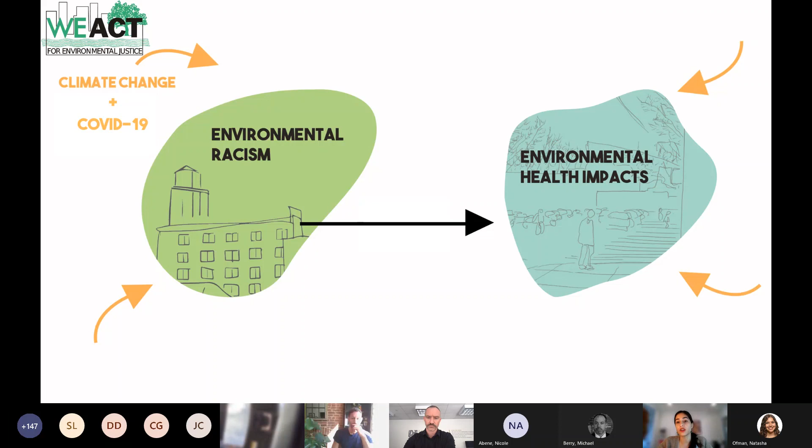Our investment is that, as an organization, we believe in environmental justice, which is the idea that everyone deserves to live in a healthy community where they can live, work, play, and pray. Particularly, what we are trying to do is interrupt the line between environmental racism, which creates environmental health impacts. And now we're at a place in the world where climate change and the climate crisis have gotten to such a bad level that we are seeing those direct health impacts and economic impacts and just general security impacts on people that live in communities of color and low income in New York City.

And then COVID-19, of course, did not help and made matters much, much worse. So we advocate for healthy housing, which is just generally the idea that everyone deserves a healthy and safe home. That was our big motivator for why we wanted to see this bill move forward. We believe that going electric and electrifying buildings leads everyone to have a healthy and safe home. So you can go to the next slide.

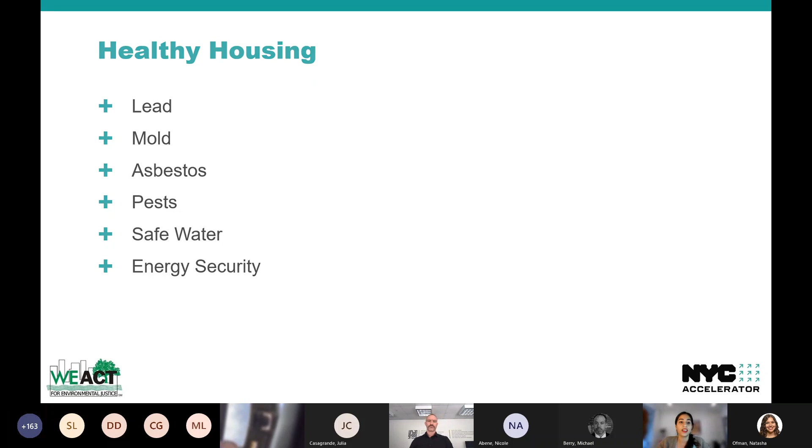Some of the main pieces of healthy housing are housing free of lead, free of mold, asbestos, pests, clean water, and, in this case, energy security — which is essentially the idea that every tenant or homeowner can afford their utility bills, a big discussion now, that they have thermal comfort so their house is adequately hot or adequately cold at the right times, that there aren't toxic air pollutants hurting health and leading to respiratory illness, cardiovascular illness, cancers, all sorts of health issues, and that we're not using fossil fuels anymore because we know that's what's contributing to the climate crisis and leading to all sorts of extreme weather events.

And now we're talking about it geopolitically in a way that really puts people at risk.

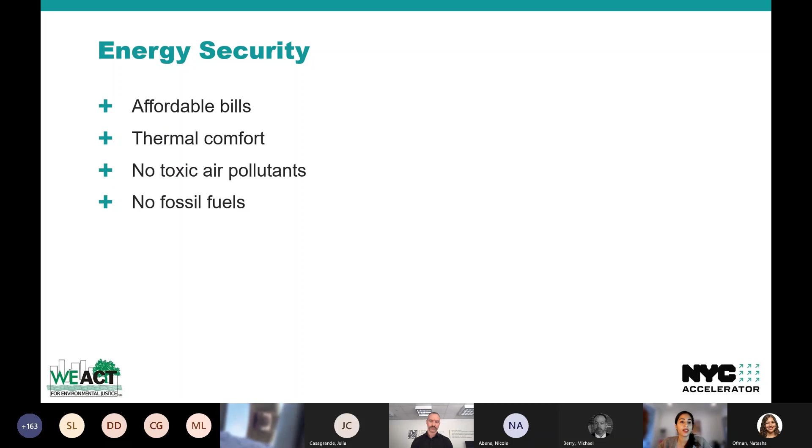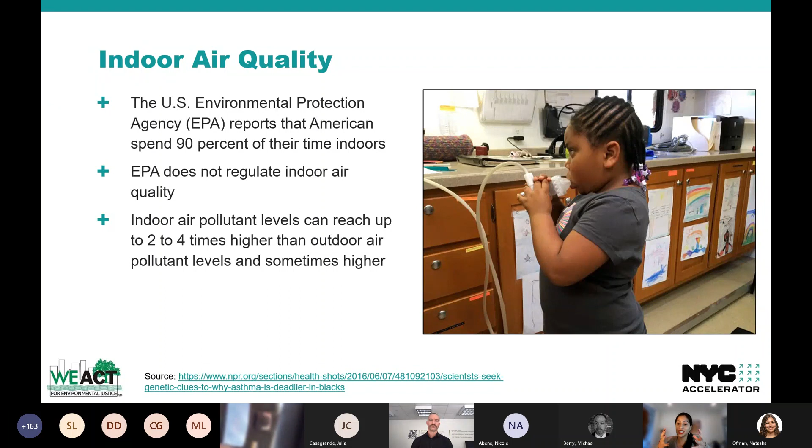We wanted to see the Electric Buildings Act move forward because we were concerned about indoor air quality. It's one of the biggest things we work on as an environmental justice organization. The EPA says that 90% of people spend 90% of their time indoors, yet they do not regulate indoor air quality. We know there are a lot of indoor air pollutants that can be really potent, especially if people are sitting in an enclosed space with that air pollution.

And that is not impacting people equally. We see low-income communities, particularly households of color, exposed to a lot more indoor air pollutants due to long-term disinvestment in housing or lack of affordability of better quality housing. People live in smaller houses with more people living in there, so crowding is really common, along with inadequate ventilation in homes, especially with regards to using a stove.

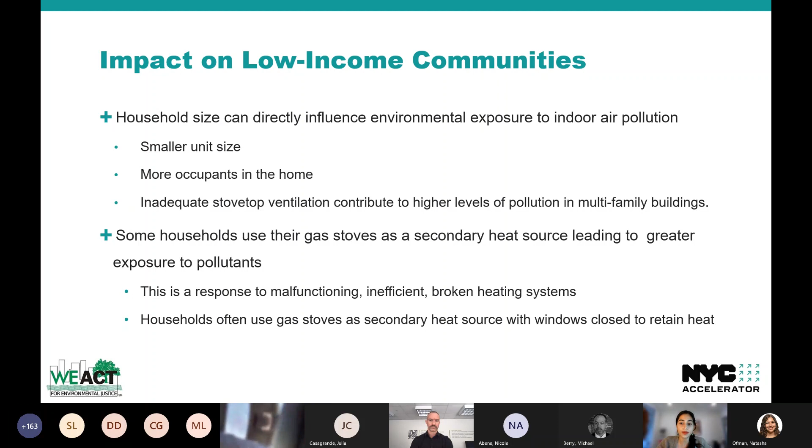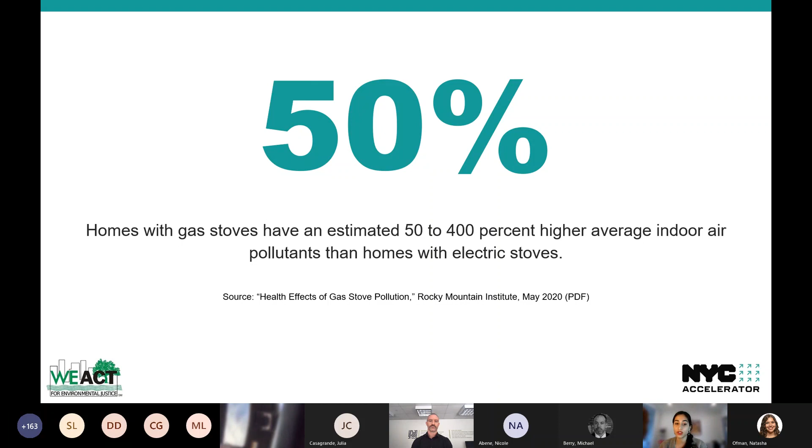Just a couple of stats here. Gas stoves are something we wanted to see switched out in homes, and that's part of the important process of electrifying a building—electrifying all of the things we use in homes that might otherwise contribute to health impacts. Gas stoves, we know, are full of air pollutants. Homes with gas stoves have 50 to 400% higher average indoor air pollutants than homes with electric stoves. So we know something is going on there when it comes to health.

We know that 55 to 70% of homes with gas stoves without ventilation experience indoor air quality that would be considered illegal if those levels were outdoors. So we know it's unsafe levels.

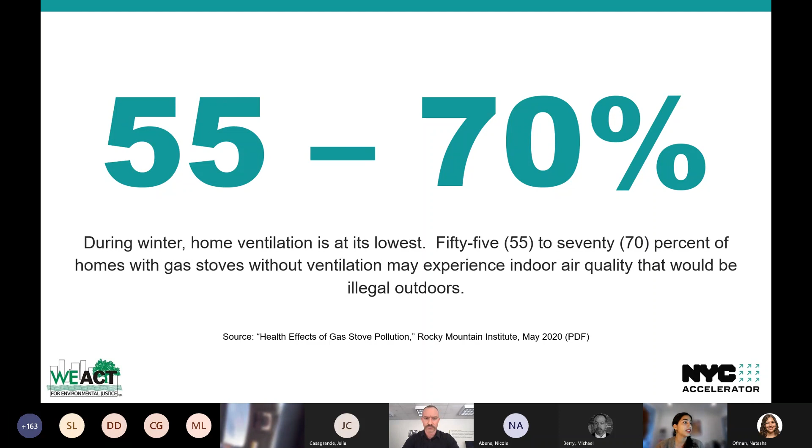A recent study found that it only takes a few minutes for the levels of nitrogen dioxide to pass a safe level once the stove is turned on. Stoves also lead to methane emissions even when they're off. We know that NO2 is a toxic pollutant that hurts health. So we have a huge investment in seeing all-electric buildings move forward, not only to fight climate change, but to create healthy indoor homes for people.

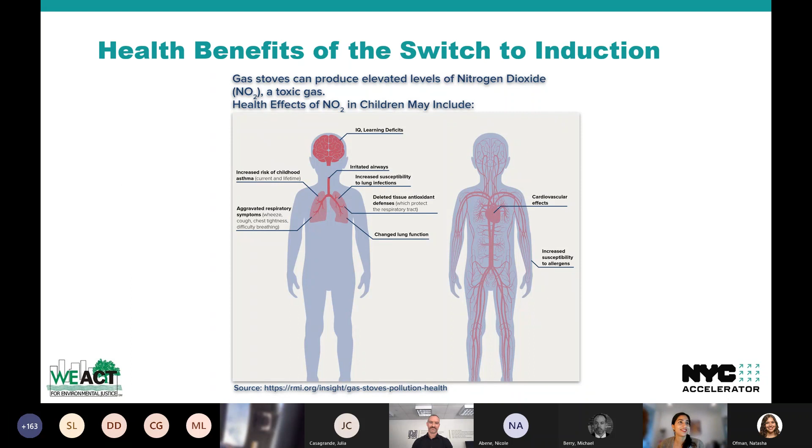So just to conclude, why do we care about Gas-Free NYC, which is the push for the All Electric Buildings Act in New York City? It's because of this air quality improvement.

But secondly, it's because we're mitigating the climate crisis—we're getting off fossil fuels. The next reason is because there are job opportunities for electrification and growing that field. The more buildings that have to go electric, the more opportunity there is for good jobs.

And the last reason is pushing technological advancements forward. If the city has to create buildings that are becoming electric, how are we making sure we have the technology for it? There's a lot of discussion about what buildings are ready and not ready for becoming all electric. Now, having this bill on the books saying that in a couple of years different buildings of different sizes need to start building electric, the industry is going to prepare for it because they have to, and because it's already in process.

So these are some of the big reasons why we were pushing Gas-Free NYC, and we were really excited to see it moving forward, and looking forward to seeing how all of New York City can live in healthy housing. So thank you.

All right, thank you, Sonal. That was a great high-level overview of all the benefits of electrification.

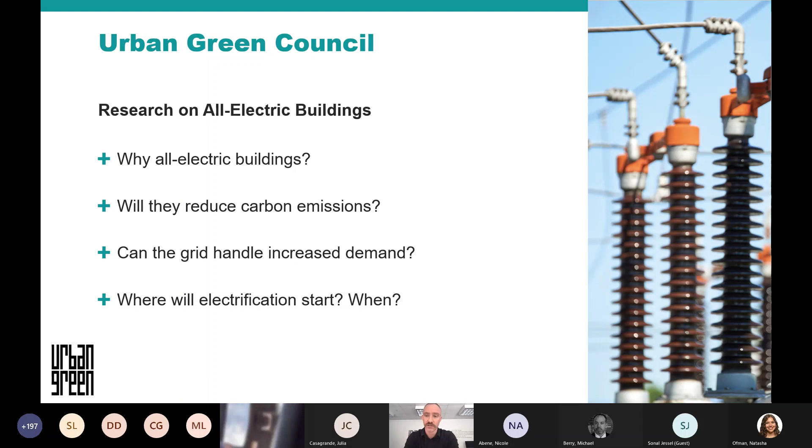All right, so why are all electric buildings so important? I would assume most of this group knows that two-thirds of New York City's emissions actually come from buildings today.

That's about evenly split between the mid-size and large buildings versus the smaller 1 to 4 family buildings. The big purple box is everything above 25,000 square feet, so that's everything affected by Local Law 97. The last third is transportation, waste, and streetlights. This really highlights why, as opposed to a lot of other cities, we have to focus on finding a path to cleaner buildings.

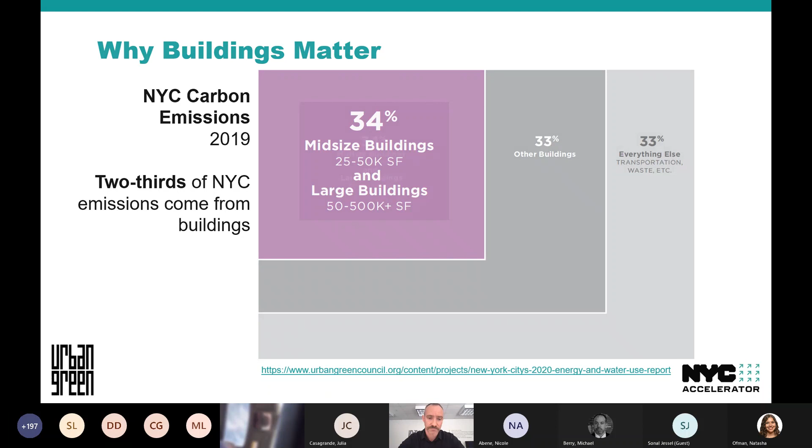So we've made a lot of progress over the last decade. Emissions are way down. A big part of that was actually a successful policy called the Clean Heat Program, that phased out heavy fuel oil in 2015.

So nearly all of the number 5 and 6 fuel oil is now gone. But you can see that gas has almost doubled, so it's about half of our energy use now in New York City's buildings. It's the dominant force. It's been cheap, it's been a lot cleaner than fuel oil, and energy efficiency programs have really been targeting electricity. So that yellow band has actually fallen over the last decade while gas has taken over.

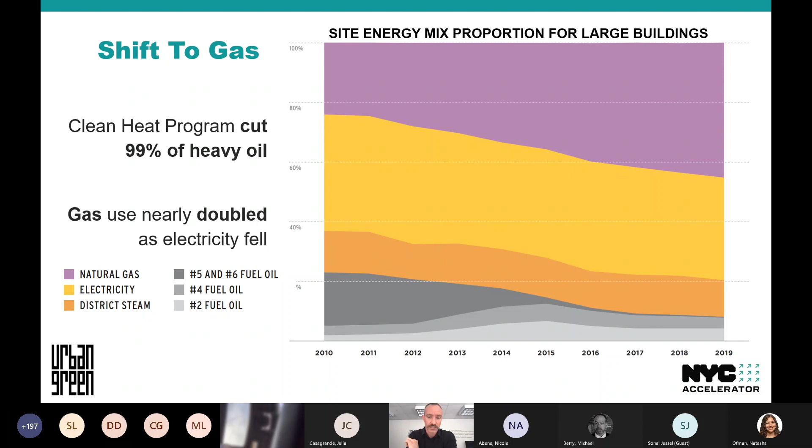So a big component of the growth in gas use has been new construction, right? And that's what this law is really targeted at. So let's quantify what we mean by new construction and how much that might mean.

Over the last decade, between 1,000 and 3,000 new buildings are built each year in New York City, and that's between 35 and 45 million square feet. Obviously we're talking about averages here - there's a lot of volatility in this market.

Most of it is single family homes, but there are about 200 new high rises built in New York City every year. You can see some of that data on the big buildings that REBNY now tracks as part of their quarterly construction report. Pretty cool data you can check out at the link as well.

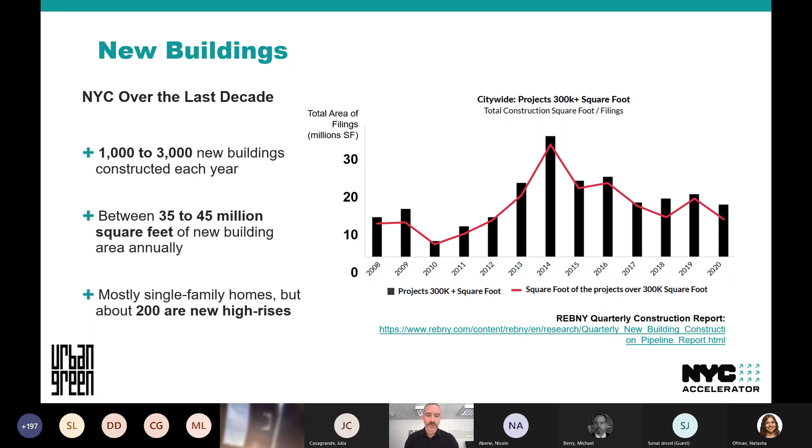All right, so we talked a little bit about the landscape of buildings in New York City. Now I'm going to go into some of our detailed information on how we're going to do this.

So we published Going Electric in 2020. That was focused on how we're going to retrofit multifamily buildings. And then in December 2021, we published Grid Ready, which is all about whether Con Edison's local grid is ready for this change.

So to start off, I just want to make sure that we're all on the same page with beneficial electrification. We're talking about heat pumps, and heat pumps are just air conditioners that work in both directions. Even in winter, there is outside air that has heat that can be pulled inside, and that's enough heat to warm your home, even when it's cold outside.

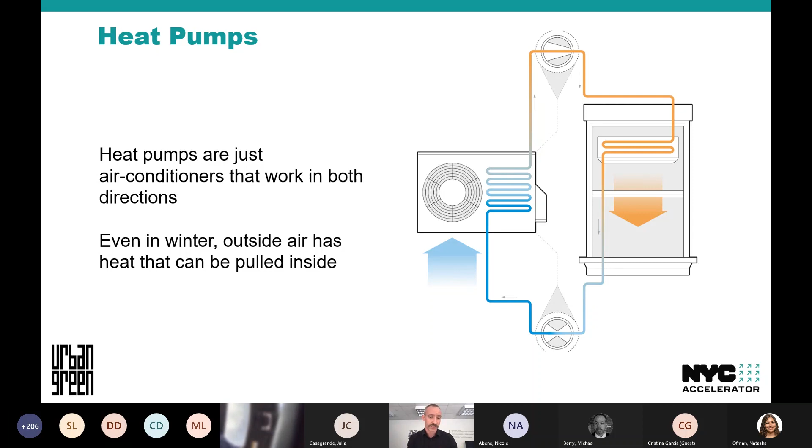That's opposed to something like thermal or electric resistance heating, which is similar to a toaster oven, where you're just exchanging 1 unit of electricity for 1 unit of heat. But heat pumps actually have the ability to take 1 unit of electricity and turn it into 3 units of heat.

So it's a big difference, but how much is this going to cost? This is pretty new information on the slide. We don't have a lot of examples of all electric buildings in New York, but some of the best information comes from NYSERDA's competition called the Buildings of Excellence competition. All of this data is public. They've already completed 2 rounds of winners, and the second round of winners was actually exclusively all electric.

So they've published this cost data, you can go check it out on their website. But it looks like the incremental costs per square foot are going to add about 6% to new construction in New York City and about 7% in upstate New York. They're pretty different, mostly because of the geographies there.

But then if you layer in incentives, the extra cost in New York City is just 3%, and then it's about equivalent for building in the rest of New York State, all electric versus traditional construction. So it's including everything from heat pumps for heating, domestic hot water heat pumps, as well as electric appliances for cooking.

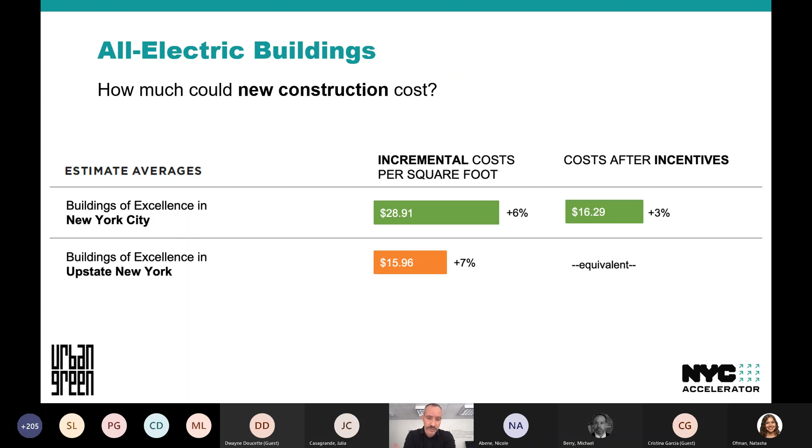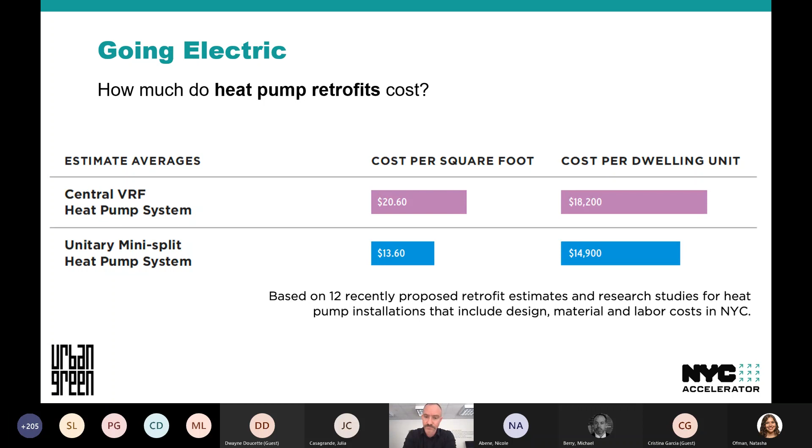That's a big difference from the next slide that you'll see. We also collected data as part of the Going Electric report to figure out how much the retrofits would cost. These are going to be a lot more expensive, and these numbers are only looking at the heat pumps used for heating, so if I was to replace steam radiators with heat pumps. We think it's going to be between $13 and $21 per square foot to do these retrofits. These are going to be much more costly than doing new construction, mostly because of all the invasiveness involved in putting in new equipment and relocating tenants during the retrofit.

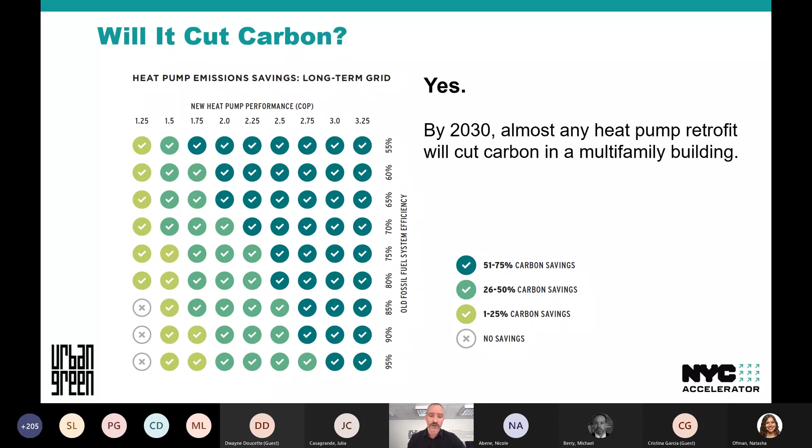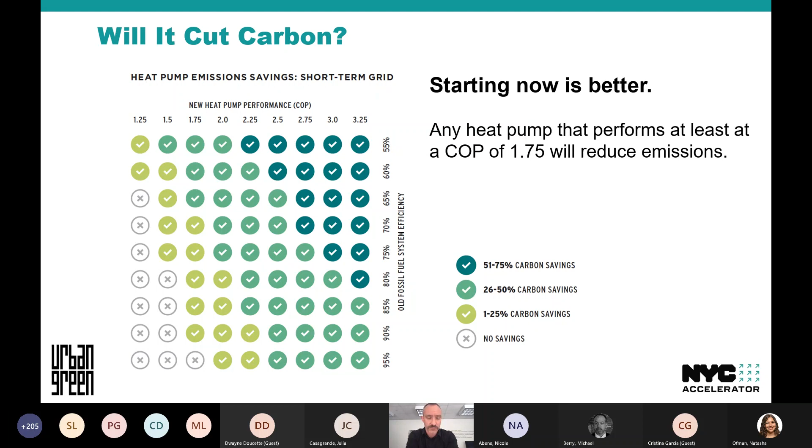But starting today is actually even better. This is with a grid that includes the closure of Indian Point, so this is like today's grid. We see that even heat pumps that operate at a coefficient of performance of at least 1.75 will also reduce emissions. So it's really something we should start to do today and take action. Our grid is good enough right now to be installing heat pumps.

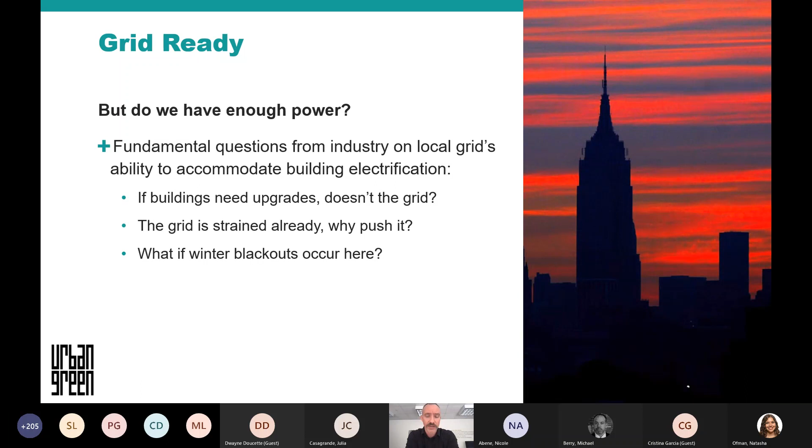Now we come to the grid piece of this. Over the last two years we heard these kinds of questions: if my building needs an electrical upgrade, shouldn't the grid also get a capacity upgrade? I know the grid is strained during the summer, so why should we push it harder? And finally, what would happen to an all-electric building if we had a winter blackout? Let's talk a little bit more about those.

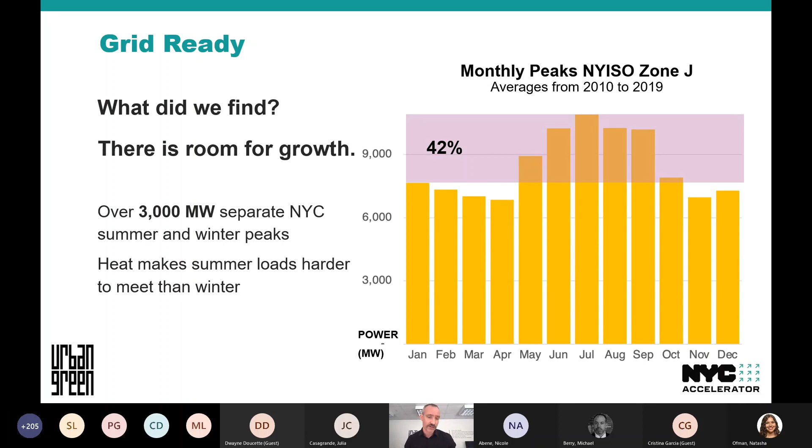First and foremost, we looked at NYISO Zone J. NYISO is the New York Independent System Operator, and that's really how they quantify New York City—we're Zone J. We just looked at the monthly peaks over the last decade, and we saw a monthly peak in July that's typically around 11,000 megawatts, and then a peak in January around 8,000. So there's about 3 gigawatts separating those two, meaning there's a lot of room for growth at the city level. On top of that, when it's hot outside, it actually makes it harder to deliver really high loads. That's why we get a grid that's stressed out in the summer—we're pumping out a lot of juice to serve air conditioners, but it's also really hot for the equipment to be delivering that power.

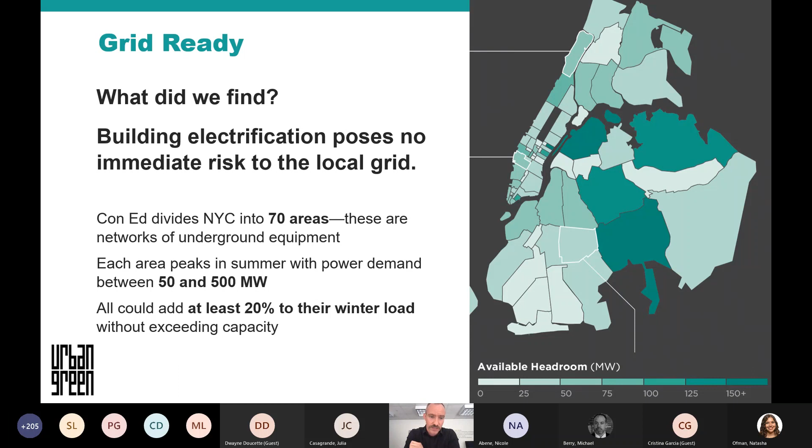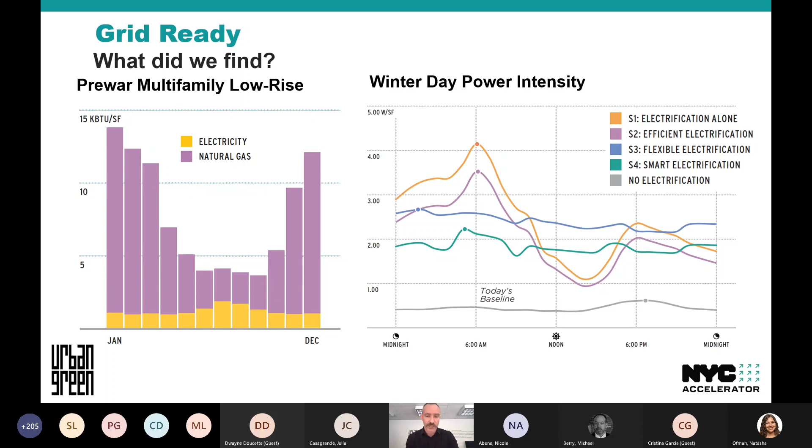When we install heat pumps, nothing else, no efficiency, no storage, we get that orange curve that peaks at 4 watts per square foot in the morning, and then it falls down to a valley around 1 watt per square foot in the afternoon. So that's a really difficult load curve to serve. We want to avoid that. We want to install things like roof insulation and new windows and big hot water tanks so that we can flatten out that demand curve throughout the day. So I'll give you a little bit more detail on that one.

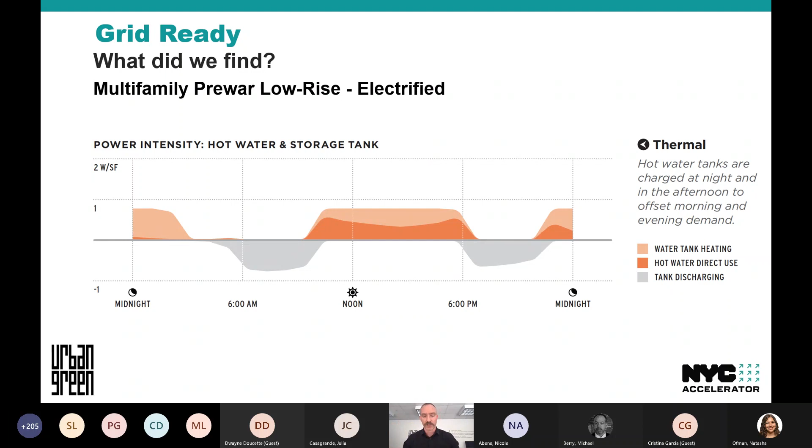And then if we layer on top of that the next piece, which is the heating, again, our heating loads are probably going to be highest in the midnight to 6 a.m. range where it's very cold. And so we're going to need some battery storage to offset some of that so that we don't get an extremely high peak in the early morning hours.

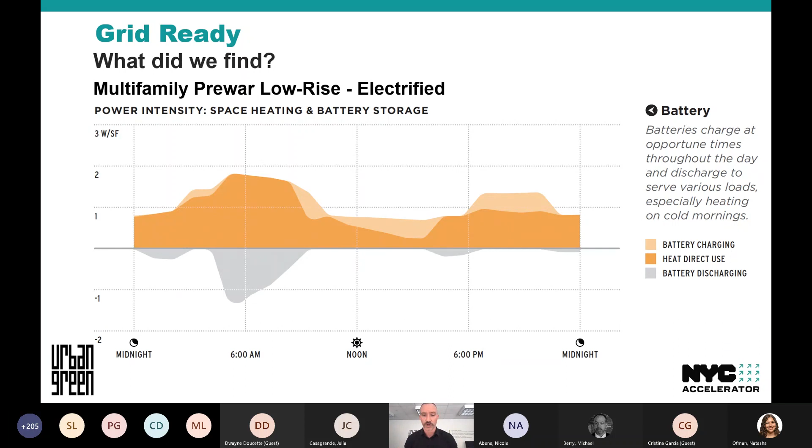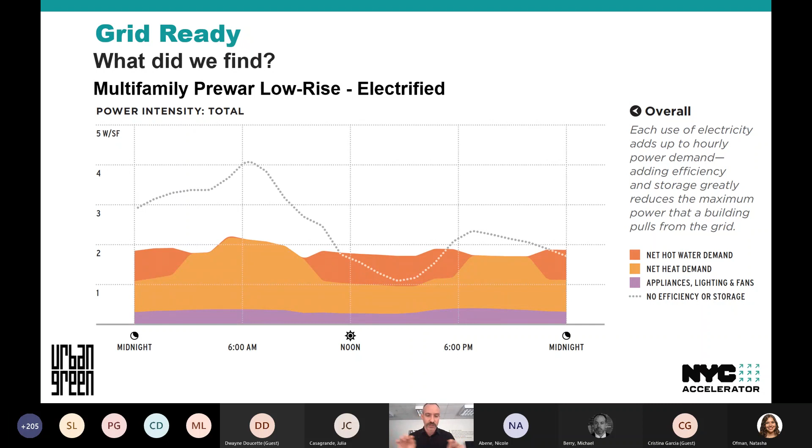And then next slide, if we layer it all together, you can see the dotted line is what we had before the efficiency and storage. And then that levelized peak is how all those different end uses fit together. And we fit the jigsaws so that we can create a flat line of power consumption. Next slide.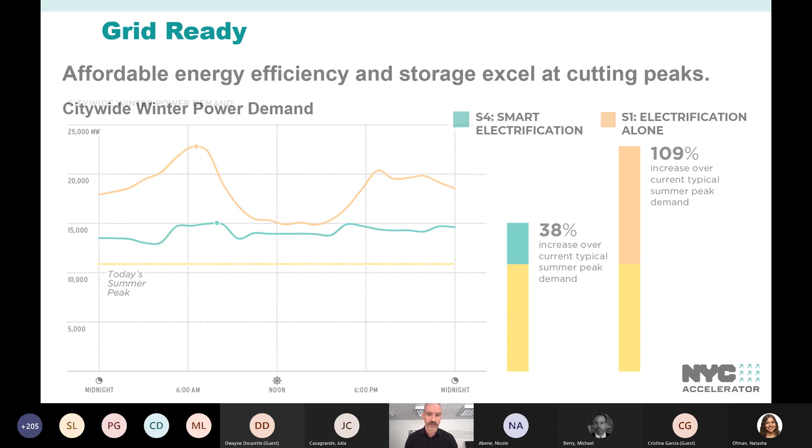And when I say winter peak, all I mean is that we're going to have our peak power demand occur in January rather than July, because we're not trying to meet up with the demand of air conditioners anymore. We're trying to meet the demand of heat pumps pushing heat into our multifamily and office buildings. Next slide.

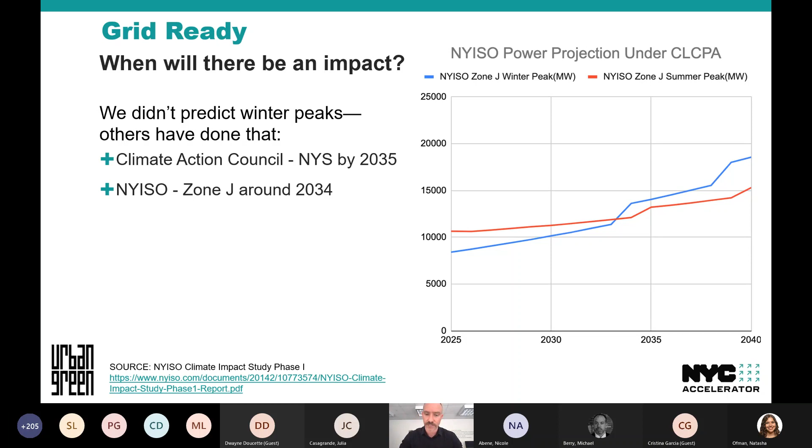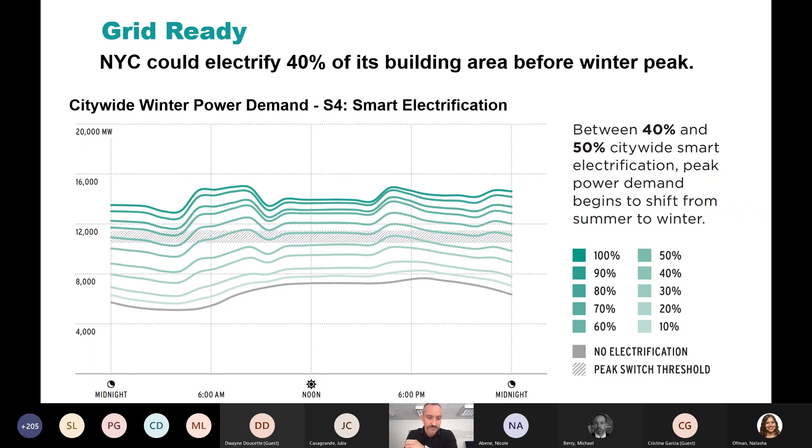So to give you a sense of when this might occur, or at least how much market penetration we would need to see this winter peak, what I'm showing here are all the bands of smart electrification. And today we have on the bottom the power demand curve for the entire city. And then each green increment is 10% of the building area citywide. And so you go 10, 20, 30, 40, 50, somewhere between 40% and 50% of the city would have to be electrified before we exceed the current summer peak demand. Now, for context, fewer than 1% of our buildings are electrified today, so that's a long way away.

The other piece of this is, where would it occur? So what we did was we also created these maps that show zip code by zip code and network area by network area where we think the winter peaks are going to occur first. Somewhat surprisingly, we found that the outer borough neighborhoods are going to flip first. So like the East Bronx, Crown Heights, Jackson Heights, these are the places where we have a lot of low-rise residential buildings, and we also have low summer peaks today. Next slide.

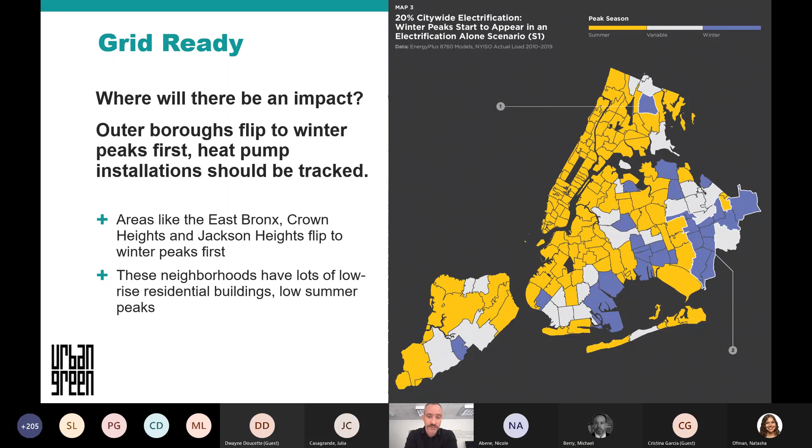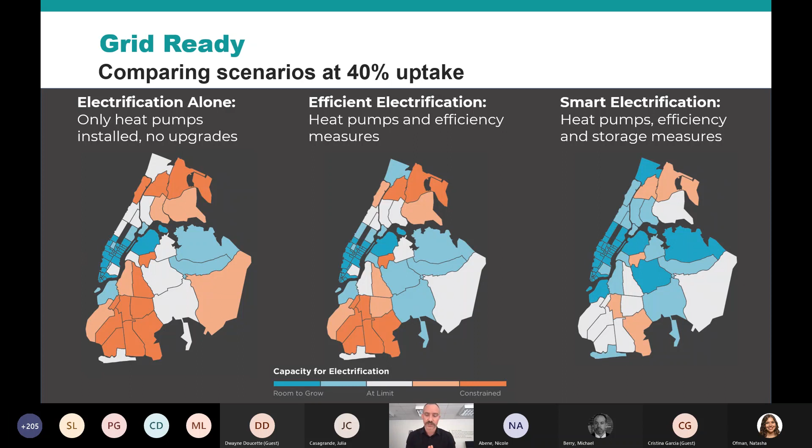Now, just because you have a winter peak doesn't mean you've overwhelmed your grid. And so you have to, again, look at the network areas and look at the different scenarios. So these are showing electrification alone on the left, efficient electrification with insulation and weatherization in the middle, and on the right, smart electrification. So you can see if we just do heat pumps, even at 40% electrification, we're going to kind of overwhelm Brooklyn and the Bronx with a lot of demand.

And you can go ahead and explore all this data on your own if you go to maps.urbangreencouncil.org. Really cool interactive map that we've designed.

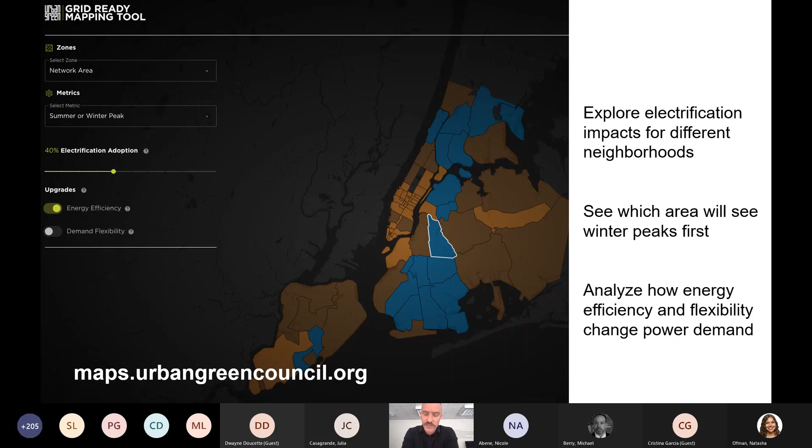Oh, can you not hear me? It's okay. I can hear you okay. If you can maybe just try to move the mouthpiece a little bit closer. Okay, can you hear me now? Yeah, I think just try to speak up a little. I can hear you well. Okay, I'll try to speak up.

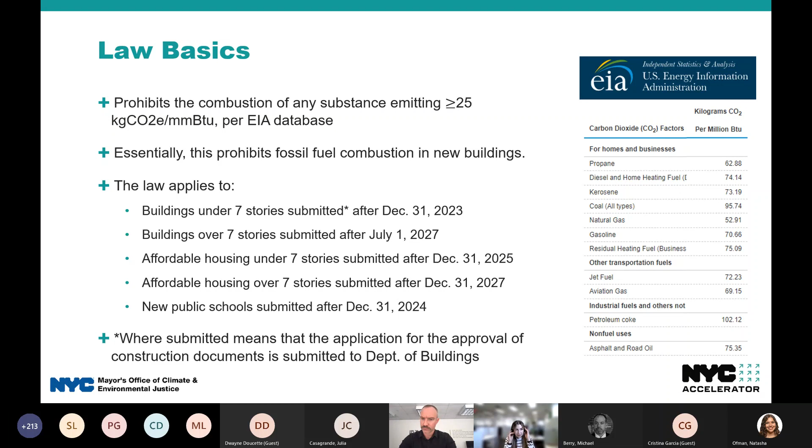So Local Law 154 was passed by the City Council and signed by the mayor in December. The law prohibits the on-site combustion of high-emitting substances in new construction. The requirement is phased in, beginning with small buildings in 2024, and buildings over 7 stories must comply beginning in July of 2027. You can go to the next slide.

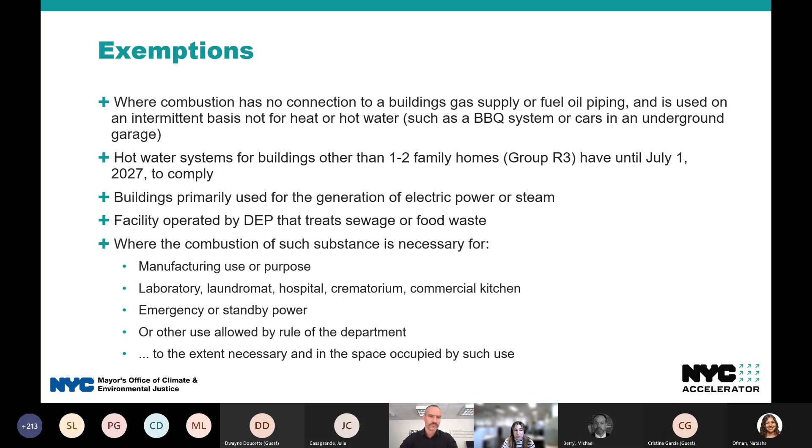So there are a few exceptions to the law, including buildings that are used for the generation of electric power or steam, manufacturing, laundromats, hospitals, commercial kitchens, and emergency or standby power. There are a couple of other exceptions listed there, and they're all to the extent necessary and in the space that is occupied by the use that's excepted. Go to the next slide, please.

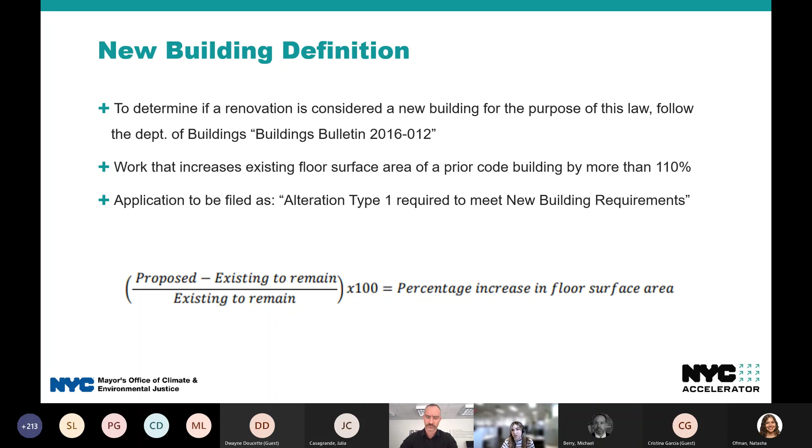The requirement is only for new construction, but some renovations rise to the level of new construction for the purposes of construction document approval. And those buildings will need to meet new building requirements, which also means complying with Local Law 154. And this is explained in further detail in the buildings bulletin that is referenced on this slide to understand which renovated buildings will have to comply as new buildings for purposes of this law. Actually, I think you can skip the next slide because Sonal and Sean covered the justifications quite well. So we can go to the next one.

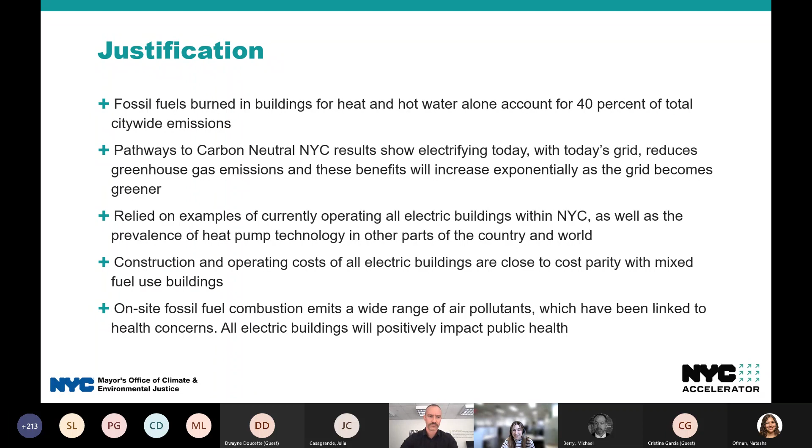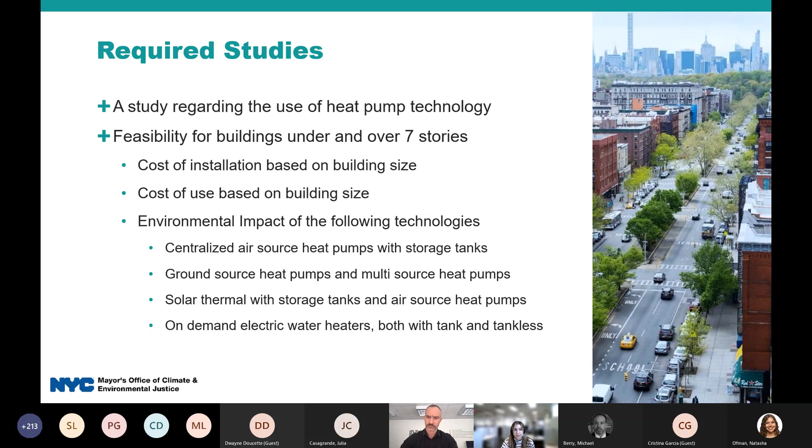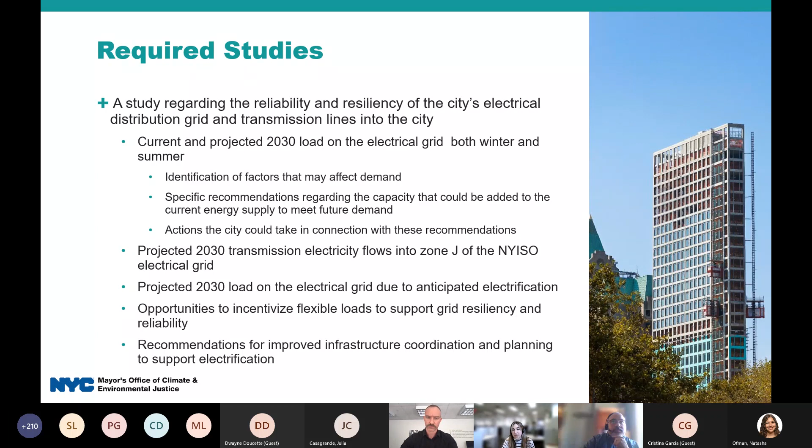And the second study is a look into the reliability and the resiliency of the city's electrical distribution grid and transmission lines, which lots of groups have been doing a lot of work on, and Sean explained some of Urban Green Council's work on this, but our office will be completing another study on this. And now I'll ask Mike Berry to talk a little bit about the accelerator and resources that are available to buildings. Thanks, Nicole. Hello, everyone.

It's my pleasure today to be able to speak to you about the New York City Accelerator and the technical resources and assistance that we will be able to provide you to meet the challenges of Local Law 154. Next slide.

The New York City Accelerator is a program to provide assistance for local law compliance to help increase energy savings while reducing carbon emissions across New York City's buildings. The Accelerator provides free technical assistance while helping to identify pathways to highlight the benefits and addressing some of the barriers that Sean discussed earlier to comply with local laws like 154.

The Accelerator also will connect building decision makers with service providers that can help with your decarbonization needs on your projects. And lastly, as Nicole just mentioned, I think where we're going to be the most helpful for some folks is helping to identify those applicable financial incentives and financing options like the New York City Accelerator PACE financing offer. Next slide.

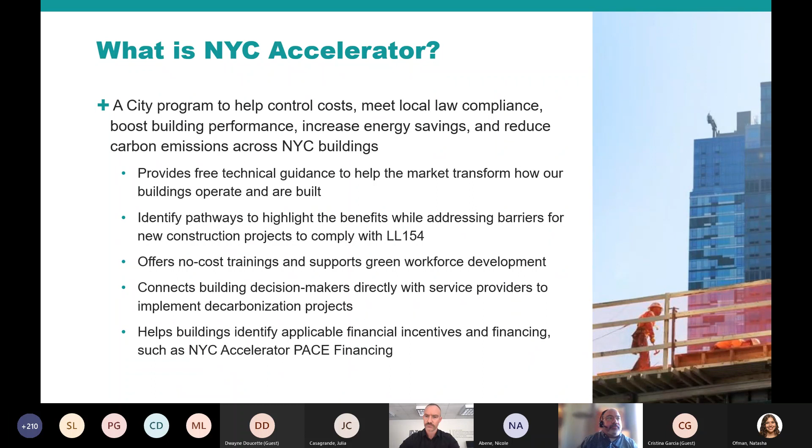So any privately owned building in New York City over 5,000 square feet, whether it's new or existing, can participate in the Accelerator. How you get involved is you just call us. We'll have one of our dedicated account managers work with your project and your project team to identify what resources and technical assistance you need, and also try to work with your teams to figure out what kind of financial incentives might be applicable to your projects.

The best part of this, there's no catch, there's no cost, there's no sign up, there's no commitment. All you have to do is call us. We're here to help. We're looking to provide assistance and help overcome any barriers or challenges with local laws like 154. Next slide.

Coming soon, we'll be providing technical trainings and resources on Local Law 154. These will be hosted on our website. Our website link is on this slide, and I know we're making this slide deck available after the presentation. We'll have a training page dedicated to trainings focused on Local Law 154, with our first training coming up on small buildings less than 7 stories. And this will be a heat pump training to assist with Local Law 154.

Also on our training page will be the New York City Accelerator's Learning Center. This is a free to use learning center with over 30 courses, with more being added hopefully daily or at least weekly. These courses can be taken in your time at your leisure. Once you get your credentials, you can log in and take the trainings.

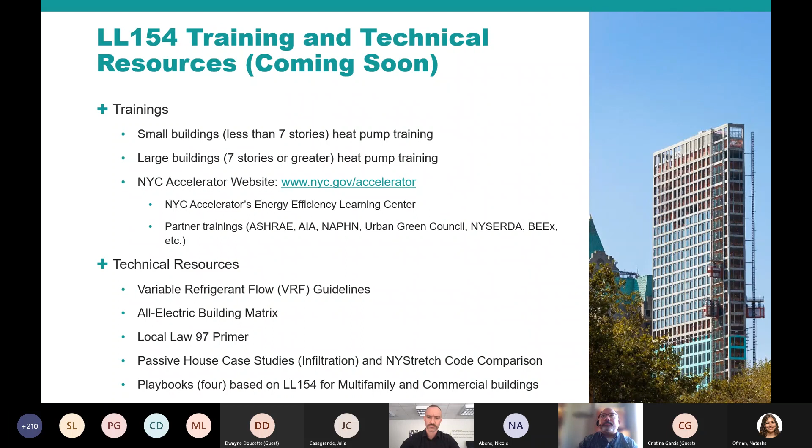So the New York City Accelerator has a new building offer. This is for new construction projects over 5,000 square feet. Account managers will be available to provide technical assistance and training resources to your building teams, to help with things like addressing local laws, but hopefully also talking about above code construction.

We're also looking to encourage building teams and building projects to incorporate new technologies like heat pumps, VRFs, green roofs, solar. We're also looking at helping to promote new building practices like passive house.

But one of the things that we think we're going to be most helpful and most beneficial to building teams is the identification of financing and incentive programs through NYSERDA, the New York Accelerator PACE financing that we've been hearing about, that has a new construction offer for buildings being built to all electric. That was just released recently. So we're very excited to get that out and assist people with that program offer.

And then the New York State Clean Heat Program, working with our partner Con Edison, making incentives available for heat pump technologies to comply with the New York State Clean Heat Program, which Sean talked about.

I think probably one of the benefits of participating in the new buildings offer is that we want to promote your project, we want to recognize it. So we have a recognition program coming out in May of 2022 that will be looking to identify buildings and building teams that are building cutting edge buildings in the city, incorporating some of these new technologies and building practices, maybe buildings today that are all electric and would exceed local law 154 or 97. We want to recognize these buildings, have a point of reference in the city where we can show that this is being done, and applaud you for your hard work.

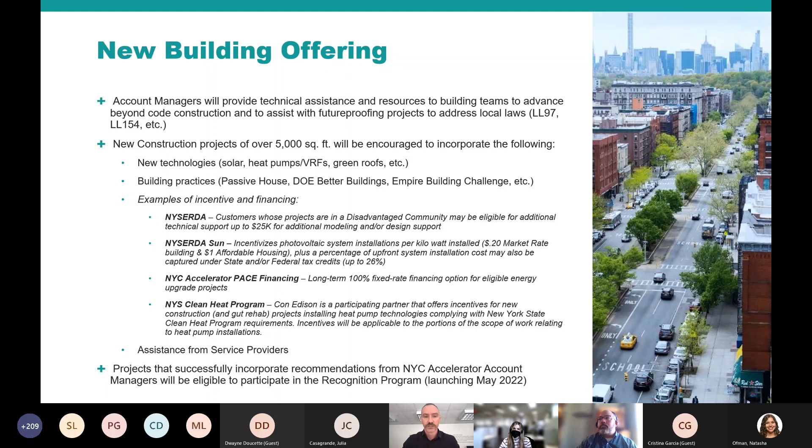I'll mention the NYSERDA Buildings of Excellence competition again. That's a perfect place to go look for funding for your all-electric building. In our research, we identified a weakness - there weren't actually a lot of incentive programs covering electrical capacity upgrades specifically. So we're advocating to expand some of the electrification incentive programs to cover that as well as heat pumps.

Another question that came through: have there been retrofits of hydronic systems using modulating chillers? I do not know of one, but I know that's an innovative idea some of the big engineering firms in the city are proposing. I unfortunately don't know one either, but we'd be interested to find out if anyone on today's presentation has or worked with one of those. Please reach out to us - we'd love to hear how that went.

An interesting question came in: how do we solve the issue of finding space and locations in older buildings for the new equipment? In existing buildings, this is a big issue. One of the ways we approached it was to say, if we're going to electrify buildings in New York City with air source heat pumps, it probably means rooftop solar has to take a back seat to the electrification of heating and hot water. So that was the big piece of it.